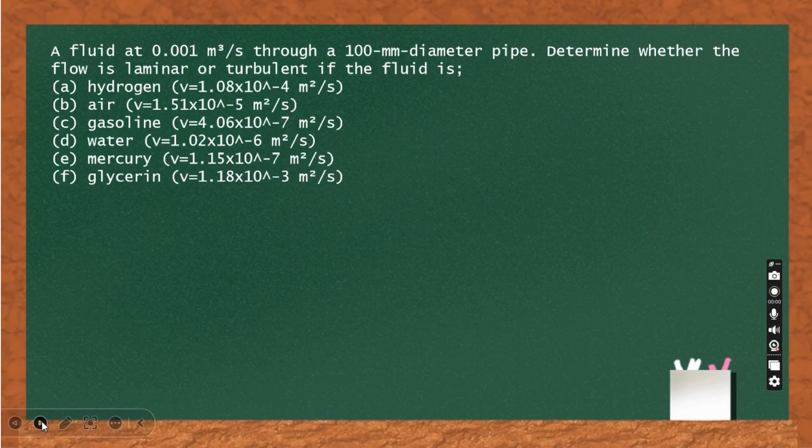So, the flow is said to be laminar when the paths of the individual particles do not cross or intersect. By many careful experiments on commercial pipes of circular cross-section, the flow is laminar when the Reynolds number is less than 2000. And turbulent flow naman, the flow is said to be turbulent when the path

lines are irregular curves and continuously cross each other. The paths of particles of the stream flowing with a turbulent motion are neither parallel nor fixed, but it aggregates to forward motion of the entire stream. A Reynolds number greater than 2000 normally defines turbulent flow.

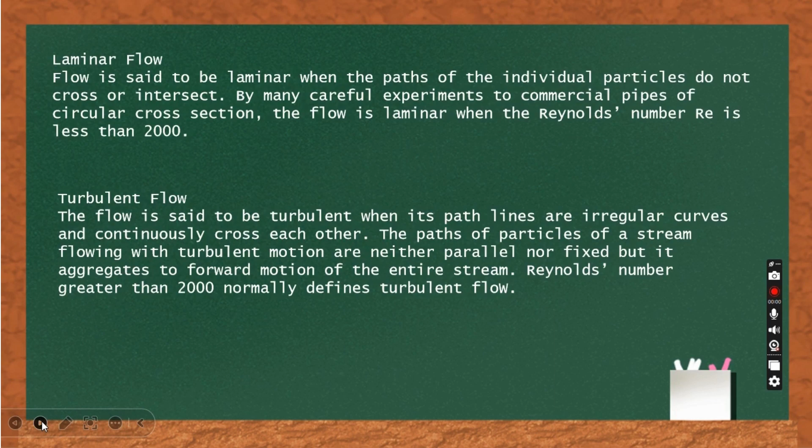First, let us list all the given data. Q, the discharge, 0.001 cubic meter per second, the diameter of the pipe, 100 millimeters or 0.1 meter, and the given data of each fluid, where V is the kinematic viscosity.

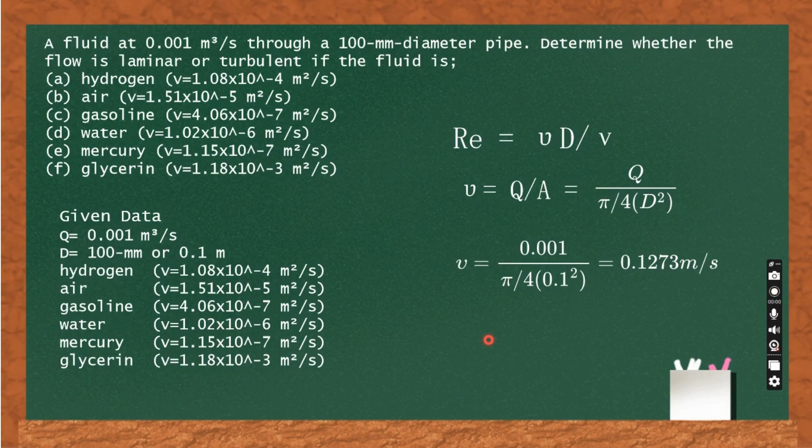Now we have the velocity, thus we can now proceed in using the Reynolds formula.

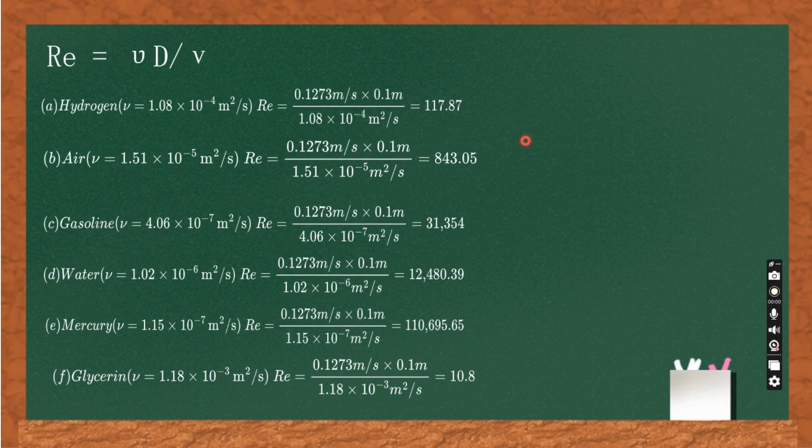So, nakikita nyo na ang ating mga sagot ay pure number. Kasi ang Reynolds number is dimensionless because the dimensions of the quantities in the defining equation cancel out. So, naging pure number na lang.